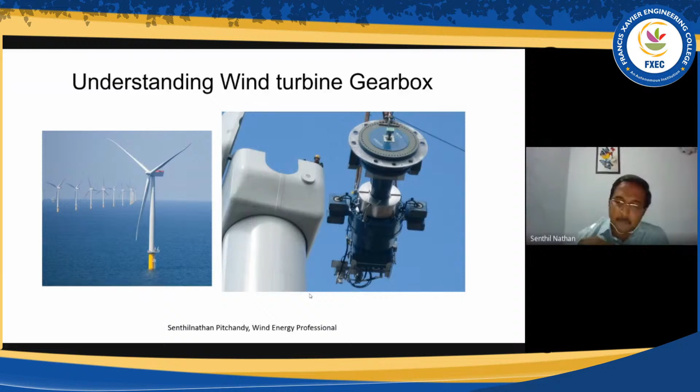In this webinar, we are going to go through the overview of global and Indian wind energy, overview of main components in the wind turbines, what are the main parts of drivetrain where our gearbox is located, fundamentals of gearbox, and what are the challenges in this gearbox industry.

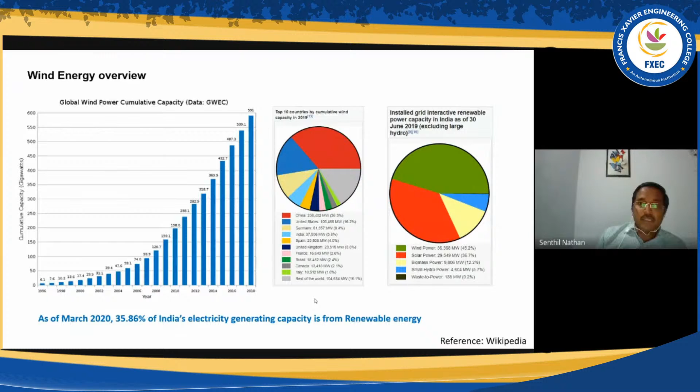Coming to the second chart, it is the country wise installed capacity. China is leading in the world with 36.3 percentage of total installed capacity. Second is United States with 16.2 percentage. Our country India is in fourth place with 5.8 percentage of renewable energy.

If we see the market, until 2010, Europe and North America were the main markets in the world. But since 2010, Asian countries also became a huge market for wind energy, especially China and India. Within these 10 years, China became number one in total installed capacity, as shown in the second chart.

In India, how the renewable energy is distributed is given in the third chart. We have a lot of resources for renewable energy, not just wind. There is a lot of solar power plants - recently a huge 750 megawatts solar power plant was inaugurated. There are a lot near Tirunelveli, and a lot of hydropower stations too, as people may have seen. There are hydropower sources available, biomass power available, and a small amount of waste to power renewable energy.

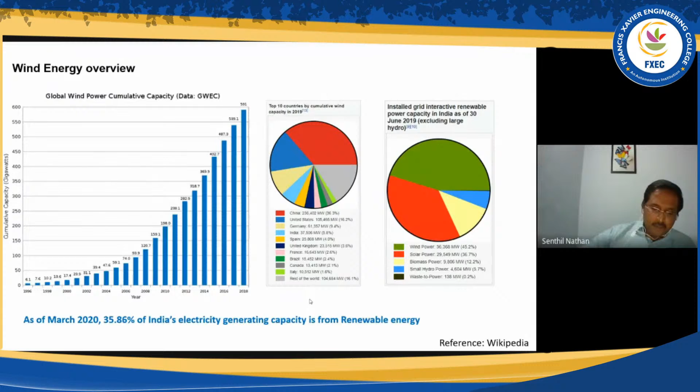Coming to the main components of geared type wind turbines - I mention geared type specifically because that means there will be a gearbox. There are turbines without gearboxes also available, called direct drive wind turbines, but the generator size will be big. There are some advantages and drawbacks between direct drive and geared type, but most of the installed turbines in the field or wind farms are the geared type. It is a traditional and well proven method, so percentage-wise most turbines are still geared type.

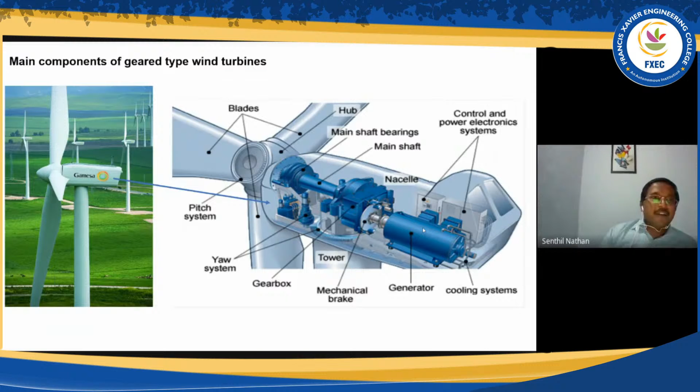Both work based on wind. A windmill converts the kinetic energy of the wind to mechanical energy.

Like our rice mill - nowadays they use an electrical motor, but at that time in remote places they would not have any electricity. So to grind grains and for other purposes, they used the wind, converting kinetic energy to mechanical rotation. That energy was even used for textiles.

In case of a wind turbine, they use the same kinetic energy of the wind to produce electrical energy. In India, to my knowledge, we don't have any windmills, we only have wind turbines. But somehow the term came from earlier days, and in many places it is still used. Actually windmill is different, wind turbine is different. We are focusing only on wind turbine.

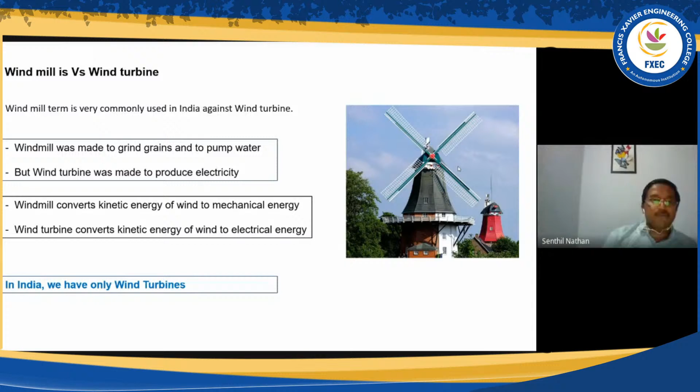Coming to the gearbox - gears are one of the oldest elements in mechanical engineering. It is even evident that it was used in BC history itself. But gears became popular after the invention of the gear generation process.

The gear generation process means gear hobbing, gear shaping operations. This created the gear production mass production concept. Before that, only milling and gear planing type operations were used, which were not accurate enough and very time consuming - you need to index each tooth, after milling one tooth you need to index it like that. So it was not a mass production concept.

The first gear hobbing was invented in 1835 by British inventor Whitworth. After that, a lot of development happened - first it was a conventional machine, then NC controlled machines came, then CNC machines came. During this development, a lot of quality improvement also happened in the manufacturing field.

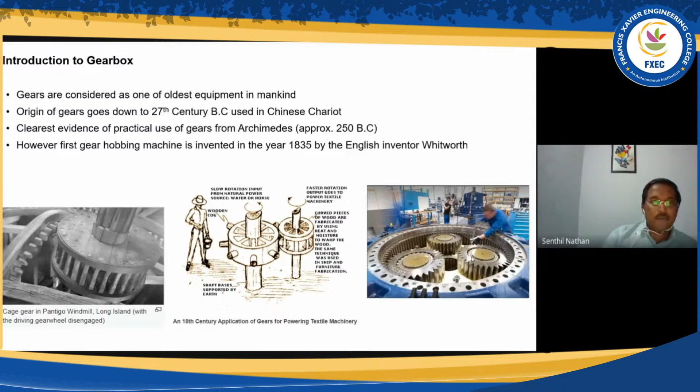Coming to the role of the gearbox in wind turbines - now we are going to see why a gearbox is used in wind turbines. It is simple actually. You have seen from outside that the blades rotate very slowly. You can count it by keeping a stopwatch, counting in one minute how many revolutions happen. It is very slow actually.

So maximum like 5 to 15 RPM. Many turbines run at 10 to 15 RPM normally, some based on wind speed, 5 to 15 RPM. But this RPM is not sufficient to generate electric power, because the generator needs a certain speed to produce electric power.

To rotate the generator armature at 1000 to 1800 RPM depends on the number of poles in the generator and the frequency, whether 50 hertz or 60 hertz. In the US it is 60 hertz, we use 50 hertz, so there are differences in the generator. Based on that, the armature shaft needs to be rotated at 1000 to 1800 RPM to generate electricity, so the gearbox needs to be a multiplier of this speed.

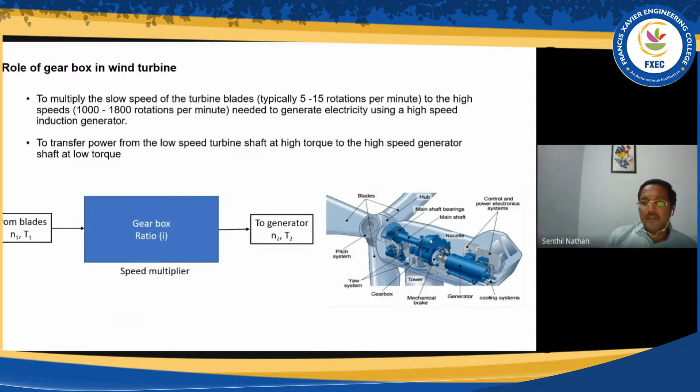Normally the wind turbine gearbox capacity is in the power range of 1500 to 6000 kilowatts, that is 1.5 megawatts to 6 megawatts, since 1 megawatt is 1000 kilowatts. It's usually given in terms of megawatts. The gearbox ratio is 46 to 120.

I'd like to mention that in India, up to now, only turbines of less than 3 megawatts were installed. But just a week before, Siemens Gamesa introduced a turbine with a capacity of 3.4 megawatts. You can see pictures on their website and get turbine-related details there, it's very interesting. This 3.4 megawatt turbine is India's current largest wind turbine, with blades about 75 meters in length. It's a huge one, interesting to read about.

Input torque at the main shaft ranges from 500 to 3500 kilonewton meters, and the weight of one gearbox ranges from 15 to 85 tons. You can assume, for example, a 2 megawatt turbine gearbox will be around 17-18 tons, so for 6 megawatts maybe this much more weight will be there.

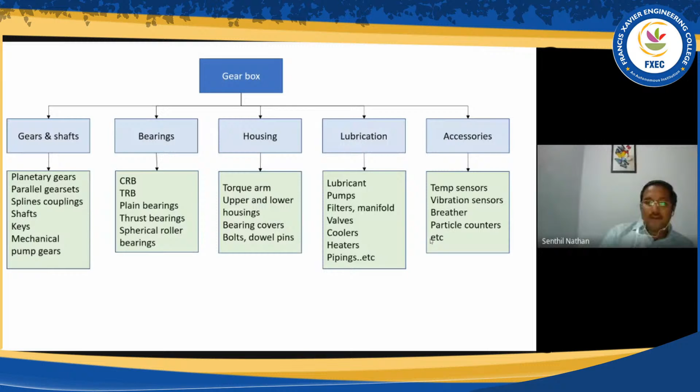Low speed stage, it is a planetary gear set. The second stage, intermediate speed stage, is a parallel one, and high speed stage is also a parallel stage.

The planetary or epicyclic, in your academy I know both the terms are used actually. The input from the blade is transferred to the gear set, to the planetary via the planet carrier.

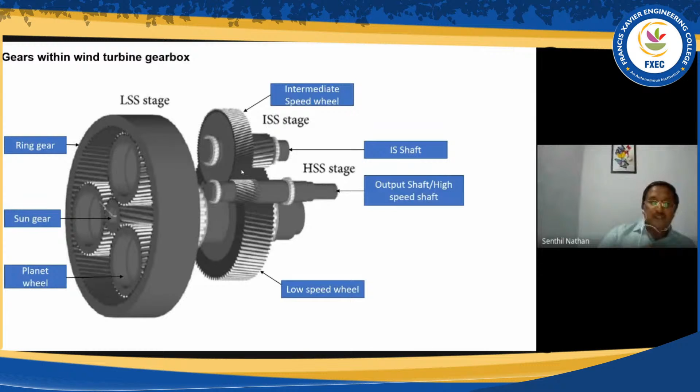We have three stages. If we see, the total ratio can be done in one stage itself, correct? Suppose you have seen the ratio is 46 to 120. Assume 120 is the ratio requirement. So to achieve 120 in one stage, is it possible to achieve? 120 to be achieved in one stage means, compared to the pinion, the wheel should be 120 times. So it will be too huge to manufacture or to assemble anything actually.

So it is impossible. So the standards, and it is a best practice, is to have the ratio in one stage within 6. This formula gives total gearbox ratio requirement is like 89. Permissible speed ratio per stage is 6. Then by considering the logarithmic ratio, the number of stages comes to 3. By providing this 6 ratio, we will have good strength.

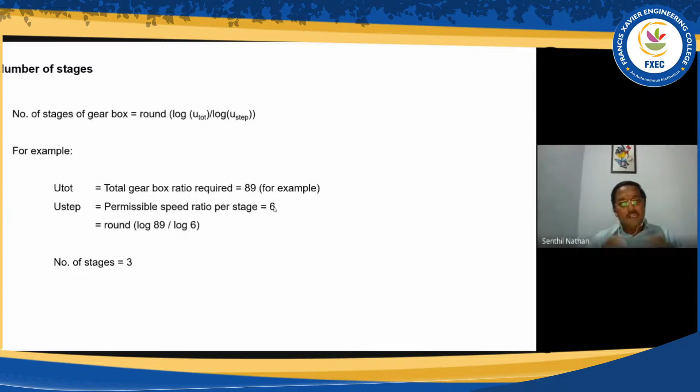It will be a compact one. It will be having more strength. It will have good contact ratio. It will give good performance like efficiency and noise conditions. That's why this number is arrived. And universally it is followed by all gear manufacturers.

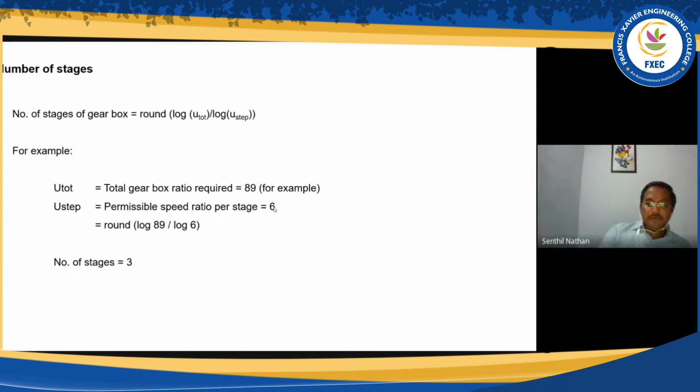In most of the wind turbines, I will say that the ring gear is a fixed part. The peculiar concept of planetary gear train is that we can achieve, in a simple single planetary, three different kinds of ratios by which one you are rotating, which one you are keeping fixed. In this case, the ring gear is the fixed one, and the planet carrier is rotating. Planet carrier supports the planet wheel, and sun gear is a driven part, which is the output.

So the ratio is calculated by 1 plus ZR by ZS. Z is normally used for number of teeth in the gear domain actually, it is a standard description for number of teeth. And this is a formula for planetary gear ratio, ZR, number of teeth is of ring gear. For example, 87 teeth, sun gear it is 18 teeth. Then the total ratio is 5.83.

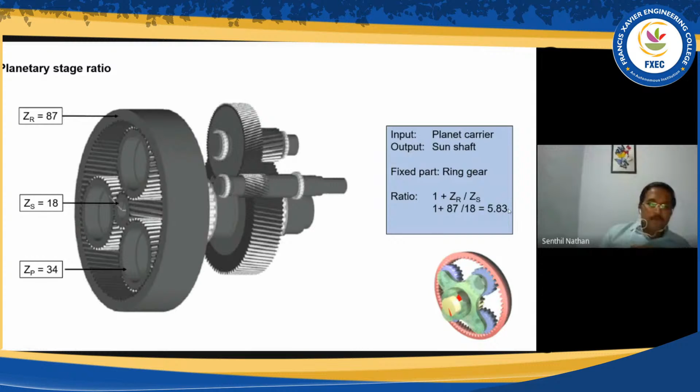What does it mean? So if the planet carrier, which is connected to the blade, that hub, is rotating at 10 RPM, assume that 10 RPM planet carrier is rotating. So when the planet carrier is rotating, then the planet will rotate. The ring gear is fixed. So on one side it is driven by the ring gear, it revolves around that, and it drives the sun gear to rotate. So the sun gear will rotate this many times the input RPM. Suppose 10 RPM is given, sun will rotate 5.83 into 10, so 58.3 RPM the sun gear will rotate. That is the concept.

Similarly, considering the other parallel stages, this second stage, the intermediate speed stage, the wheel number of teeth is 74 and pinion number of teeth is 18. Let me explain actually.

I am using the terms gears, wheel, pinion. All the elements are called gears. In a gear set, one will be bigger and one will be smaller. Whatever is bigger is called the wheel, and the smaller one is called the pinion. Both are gears, but the bigger one is specifically called the wheel.

So this wheel with 74 teeth drives the pinion having 18 teeth. This ratio, since it is a parallel stage, is simply the ratio of number of teeth: 74 by 18 equals 4.11. In stage 3, the wheel mounted on the same shaft has 92 teeth, and the pinion has 25 teeth, so the ratio is 3.68.

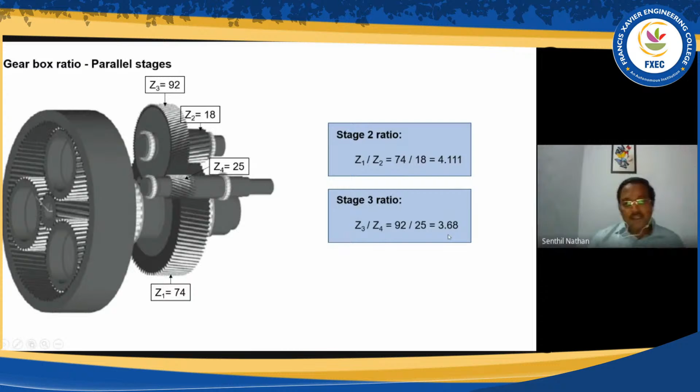Considering all the stages, it is very simple - you just multiply the ratios of all stages: stage 1 into stage 2 into stage 3. It comes to around 88.18. If the requirement is like 89, as in the example earlier, we cannot achieve the exact ratio because the number of teeth needs to be a whole number - we cannot have 87.1 or 87.2 teeth. So there will be plus or minus 0.2, 0.3 percent tolerance given by the customers. So 88.18 ratio is what comes out.

So overall, as in the example I told, 10 RPM is given as input - the planet carrier or blade is rotating at 10 RPM. The output shaft will now be 880 RPM. So with the 88.18 ratio, you just multiply by 10, giving 880 RPM as the output shaft speed. This shaft is connected to the generator, so the generator will rotate at 880 RPM.

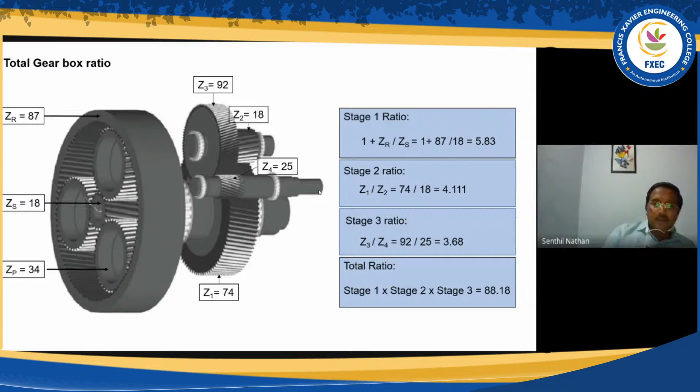But why is the planetary stage used, especially for the first stage? We know the first stage takes high torque input from the blades. In a simple gear set, the contact ratio is too less since it is just one mesh. So the entire load from the blades needs to be taken by this single gear mesh, which is quite impossible unless you make the teeth too big so that just these two teeth bear the entire load.

In the planetary drive, there are three planets, so you can see three positions where meshing happens. The torque is distributed among the three planets. If you have 4 or 6 planets, the distribution happens across 6 places.

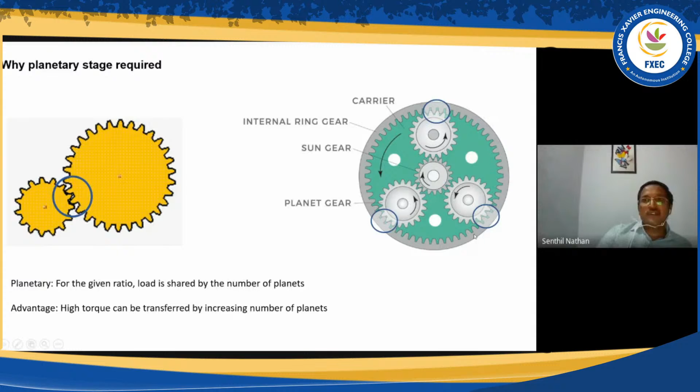What's the benefit? For the same torque, you can go for a smaller size of tooth. Like a heavier person taking one load alone versus 2-3 smaller people taking the same load together - same concept. You can go for smaller gears, with even 6 planet wheel concepts available, making it very compact. The advantage is in manufacturing - if it's too big, manufacturing, transportation, and servicing all become complicated.

It's not only the gearbox size that increases if you go very big. The gearbox is placed at the top of the tower, so the entire nacelle enclosing the complete gearbox would also increase in size. It doesn't end with just the gearbox - it results in a lot of other parts increasing too. So making a compact gearbox is the ideal solution, and that's why the planetary stage is available in all wind turbine gearboxes.

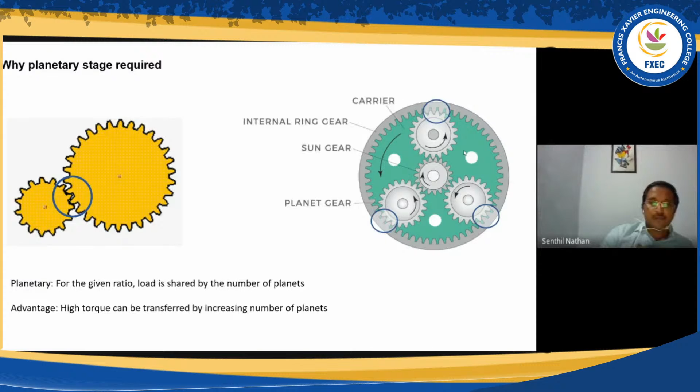Coming to the bearings - in the first stage, which is the planetary stage, it is supported normally by cylindrical roller bearing and taper roller bearing on both sides. Any shaft needs to be supported on both sides. In this case, it is cylindrical roller bearing, and this looks like ball bearing in this view.

In the planets, you can see they are supported by 4 cylindrical roller bearings, but in most wind turbine cases, it will be taper roller bearings only, because in all turbines helical gears are used.

So helical gears will have good strength, good noise performance related to the noise. It can be compacted for the same capacity, for the same megawatts capacity. You can make a compact gearbox with helical gears, but the drawback, you may have already learned that drawback in

helical gear is axial forces. So you need to hold it.

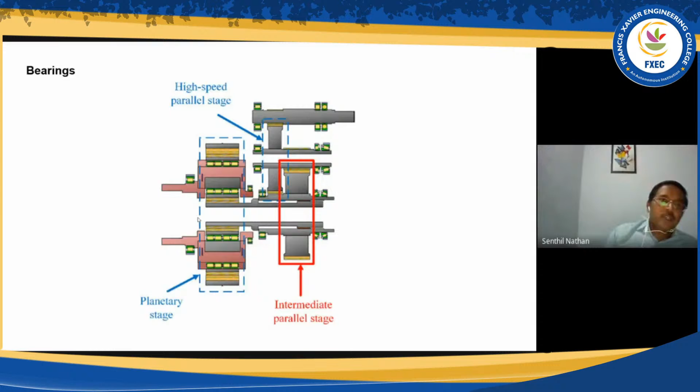Coming to the lubrication system, why is lubricant or lubrication used?

Mainly, it reduces friction. Whenever there is movement of parts like gear meshes happening and bearing rotations happening, it produces a lot of heat. So to reduce heat, to reduce friction between the moving parts, you need to have a certain lubrication film thickness, and it reduces wear between the moving parts.

Also, a lot of heat will be generated due to these rotations, so we need to dissipate that heat, and this oil will act as a protection layer. It will protect against corrosion and oxidation of the parts, and also ensures smooth operation of the equipment.

Whatever wear particles are on the gear teeth or bearings will be taken away, because the lubrication here is forced lubrication in most locations. In some areas, dip lubrication is also available, but in most areas it's forced lubrication. Either way, it will carry away the wear particles, whatever micron-level wear is there, so it will not stay there.

Immediately it will be taken away by the lubrication system or lubricant, and it will be circulated again through the filter, where it gets filtered. So the oil will always be clean, and the components also will be clean. This is the main function of the lubrication.

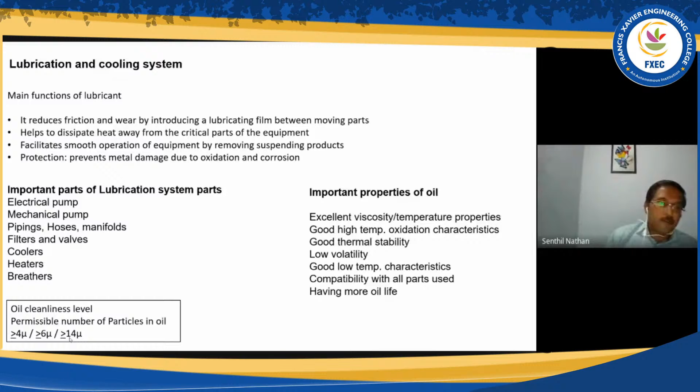So, oil cleanliness level - I am giving this to help understand how much cleanliness is required in wind turbine gearbox oil. There are standards for approval of wind turbine gearboxes: greater than 4 microns, only this many number of particles are allowed. Greater than 6 microns, only this many particles allowed. Greater than 14 microns, this many particles allowed. So our oil should have that much cleanliness, otherwise we cannot get certification, and a lot of other problems also will come.

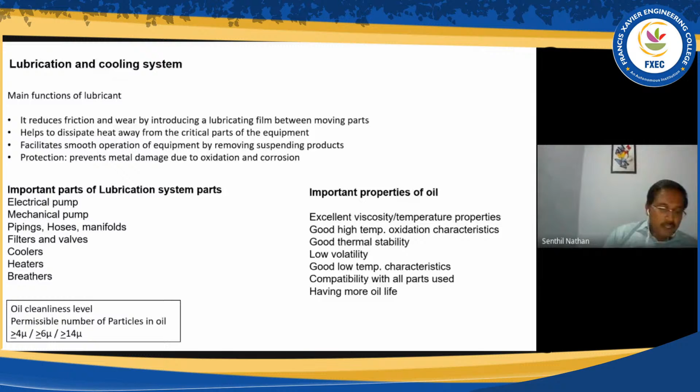Condition monitoring - there will be a lot of sensors in the gearbox, like temperature sensors at bearing locations, and accelerometers for vibration measurement around the gearbox.

And an oil particle counter. As I mentioned earlier, wear particles will be taken away by the lubrication oil. So this oil will go through the filter, and the oil with particles will be passed through this particle counter. The particle counter senses based on particle size and detects whether there is a sudden increase of particles or not, and what kind of particle size. So it is good at detecting failures at an early stage without disassembly of the gearbox. That is the main thing.

It is a preventive maintenance kind of approach, and the sensor signals are captured by the SCADA system - the supervisory control and data acquisition system. This system is the nerve center of the entire turbine. It's not only the gearbox, but the entire turbine - pitching, generator, wind speed sensors - all signals are connected to the SCADA system. We can monitor the behavior of the turbine just by sitting on our computer wherever we are, even from home. You can see, okay, this turbine's bearing temperature is suddenly increasing, some problem is going on, or some turbine has stopped because of heavy wind.

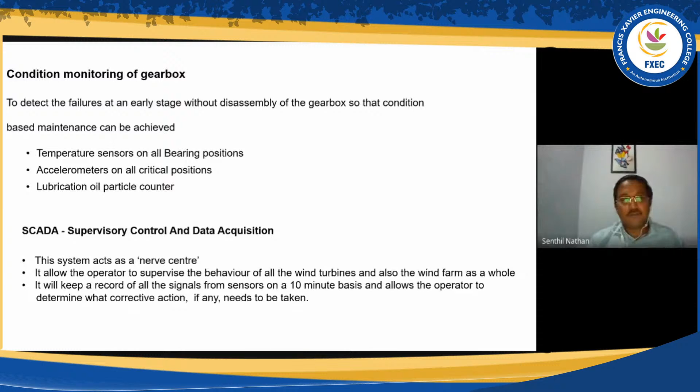If we see the turbine capacity, it is continuously increasing year on year. Even in 2016, it was 8 megawatts - I don't know if that is commercially available or not, I'm not sure. Even the latest, the highest megawatt proposal given is from Siemens Gamesa, at 14 megawatts, and they are starting work on the design. 14 megawatts means - you can assume, in India now only 3.4 megawatts was recently launched. So you can see the difference, it's a huge turbine. So there is a continuous increase in wind turbine capacity.

So we need to keep updating our gearbox design. More gearbox size means more weight also coming into your manufacturing capacity, and a lot of complications in the manufacturing.

A very flexible and highly scalable product platform is needed. Earlier we designed a unique gearbox for each gearbox requirement, for each turbine platform, like 2.3 megawatts - we would design this gearbox specifically like that. A unique gearbox is designed, but it takes a lot of time. Now, in a very competitive atmosphere, we need to deliver very fast. So we design a standard product platform which can be used - say the input target is 2000 to 2500 kilonewton meter, we can select this planetary stage and directly use it like that. So a different modular concept has come into wind turbines recently, and all manufacturers are accommodating it.

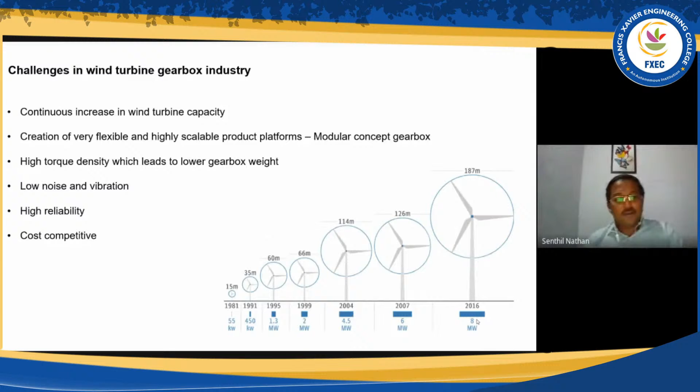From the manufacturing perspective, if we see the size of the gears, it is a huge size. Actually there are some constraints with this kind of increasing capacity of the gears, especially in manufacturing. If we see the size of the gears, they are too much - currently the industry is actually supported by only a few suppliers in the market. Heat treatment process - you may understand, doing such huge components, heat treatment is very difficult. Case carburizing and nitriding is widely used in this, and very high steel quality is maintained.

The production of wind turbine gears is very much equal to aeroplane gears - that's the quality level maintained. The DIN 6 quality gear finishing used in flights means the same quality is maintained in wind turbine gears also - that much high quality. Steel quality plays a role - meaning how much inclusions or non-metallic particles are involved in the steel. So too many checkpoints are there that need to pass for better performance and life standpoint. And casting, machining, grinding - because of this size constraint, there are huge castings, huge forgings, and stringent quality requirements.

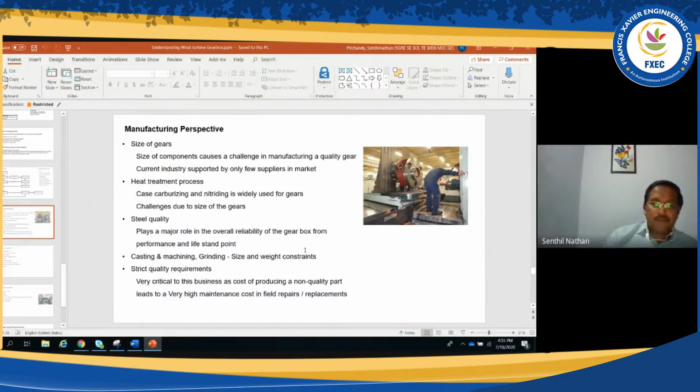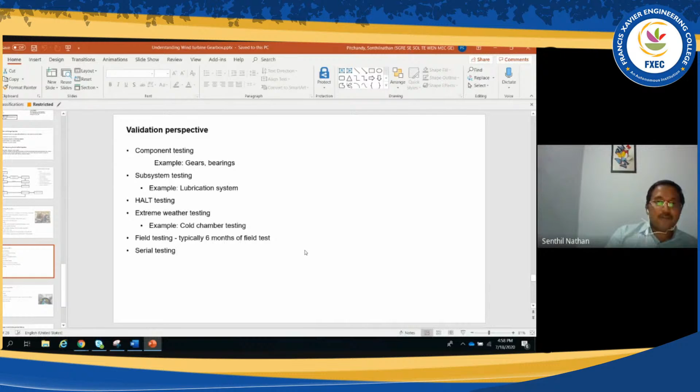On the maintenance perspective, periodic oil sampling means occasionally taking oil samples so that if any abnormal damage is there, it is sent to laboratories to check what particles are present. If there is a brass particle, some brass-related part is wearing; iron particles could be gear-related steel or bearings. Also whether any water content is there, any oxidation, or more additive is present. A lot of analysis happens, and once in 5 years the oil will be changed and the filter changed.

Visual and endoscopic inspection - endoscopic inspection is like in the medical field, where they put an endoscope inside the body to check the condition. Similarly, in wind turbine gearboxes, all gearboxes are tested by endoscopes, putting a camera inside the gearbox to see the damages in bearings and gears, and based on that they decide whether to run as is, or stop the turbine.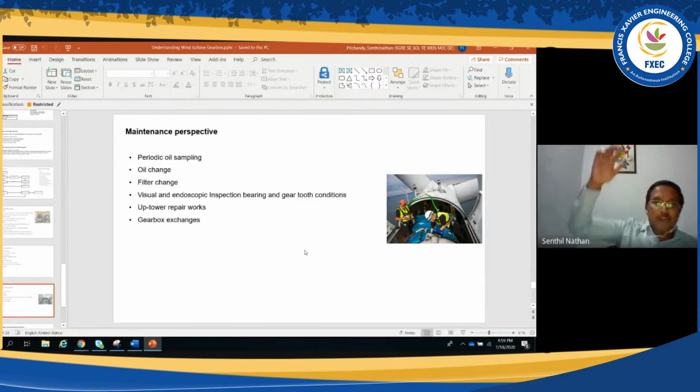Up-tower repair work means some repairs can be done above, on the turbine itself. On top of the turbine there are also local cranes that can carry a certain amount of load for repairs. Sometimes if up-tower repair is not possible, they need to exchange the gearbox, which will be too expensive.

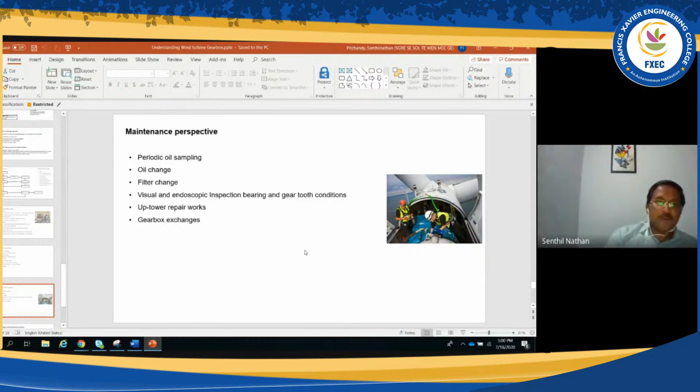That is the end of my presentation.